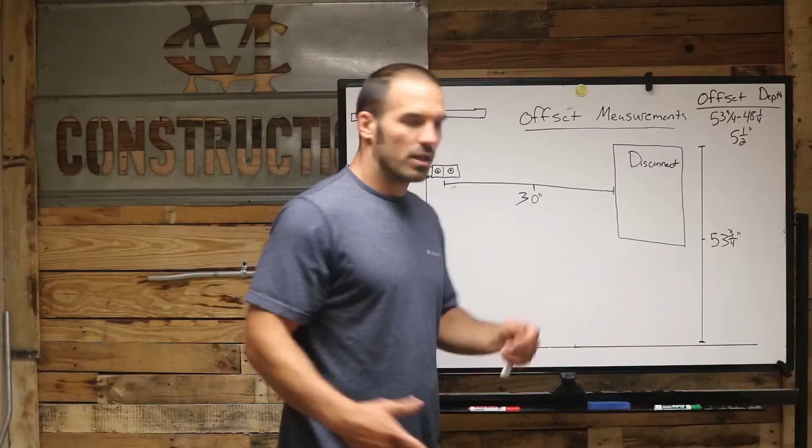In our scenario today, we're going to be trying to get over this disconnect in the field. It could be a plumber's pipe, it could be a HVAC pipe, it could be anything. So before you bend your offset, there are three key measurements you got to take, okay? The first measurement is going to be the distance between your pipe and whatever you're trying to go over or around. So in our scenario, we're going over a disconnect.

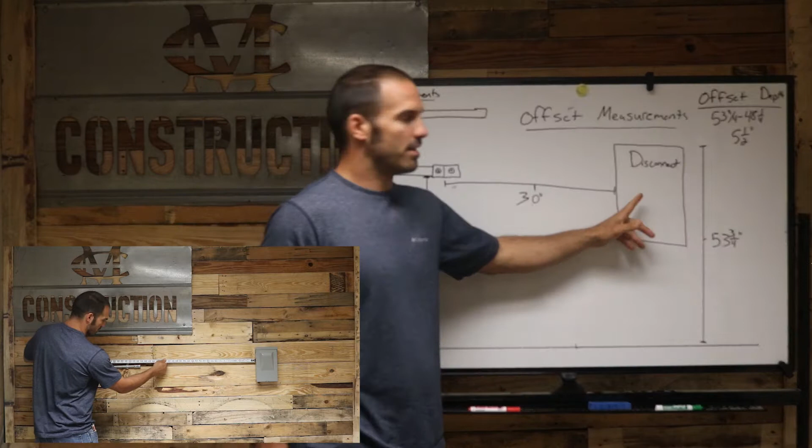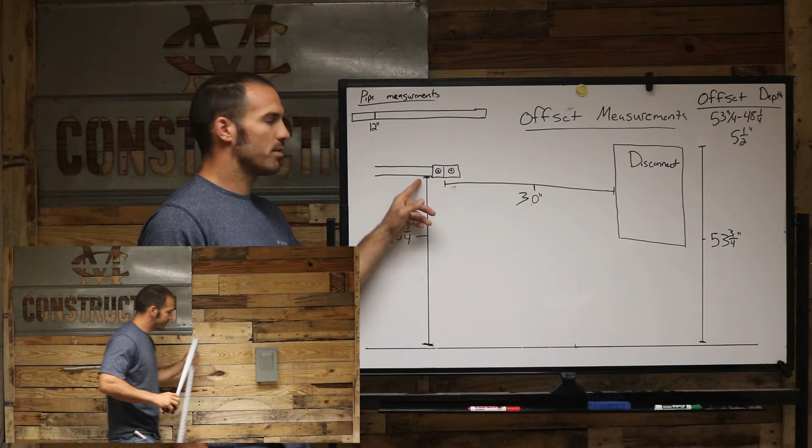I'll measure from the center of the coupling to the edge of the disconnect. We got 30 inches, okay? The next two measurements are important to calculate your offset depth. So the first one, you'll measure from the ground to the bottom of your pipe. Or if you're working on a lift, you can measure from the roof or something. But something that is flat, level, you can measure off of.

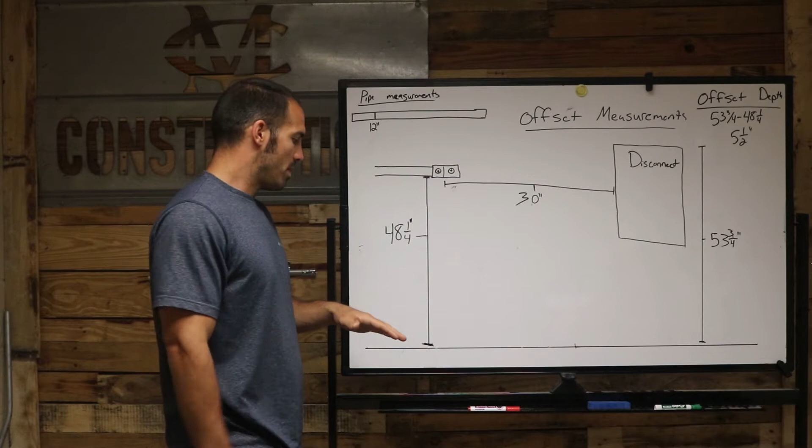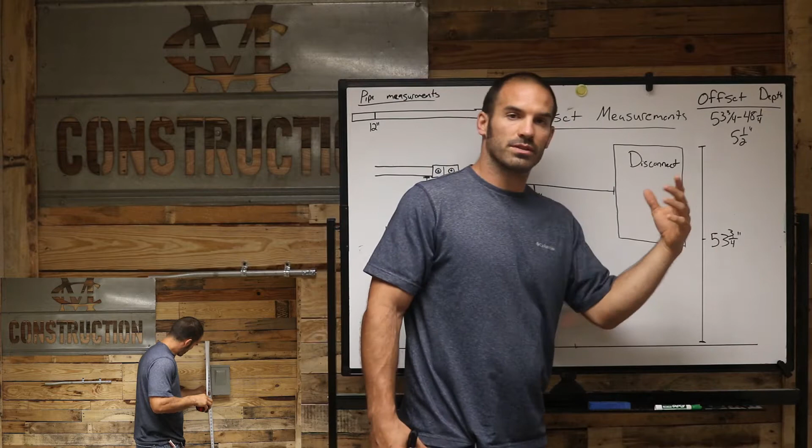So I measure from the ground because we're on the ground. 48.25 from the ground to the bottom of the pipe. I'll measure from the ground up. 53.75 is my measurement. So what I want to do with those two measurements is I take my 53.75 and I subtract my 48.25 from it, so that gave us 5.5.

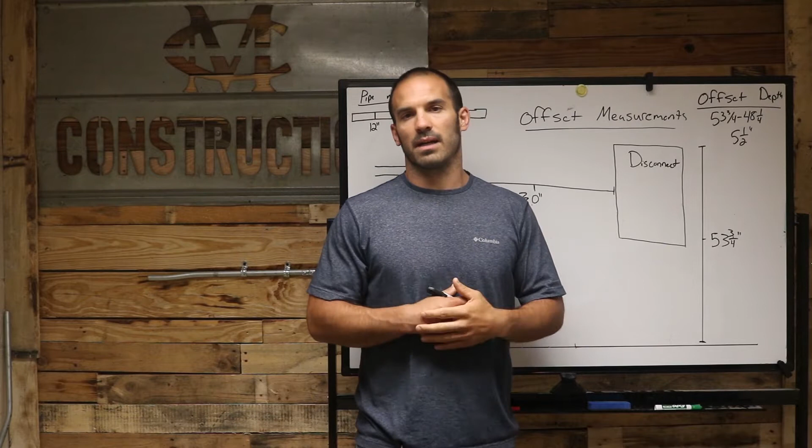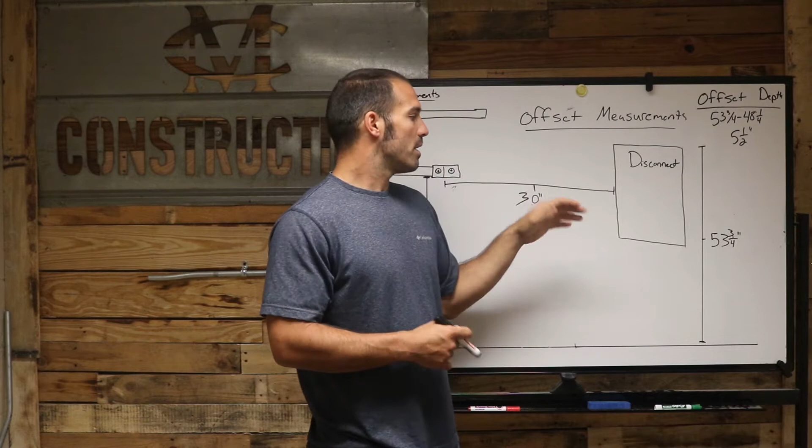Okay, I like to add about a ½ inch just to give some clearance. Sometimes you got to do them perfectly, but I'm gonna give myself a ½ inch clearance over this disconnect since my pipes in the disconnect are coming from the ground and I can go over. So I'm gonna do a 6-inch offset.

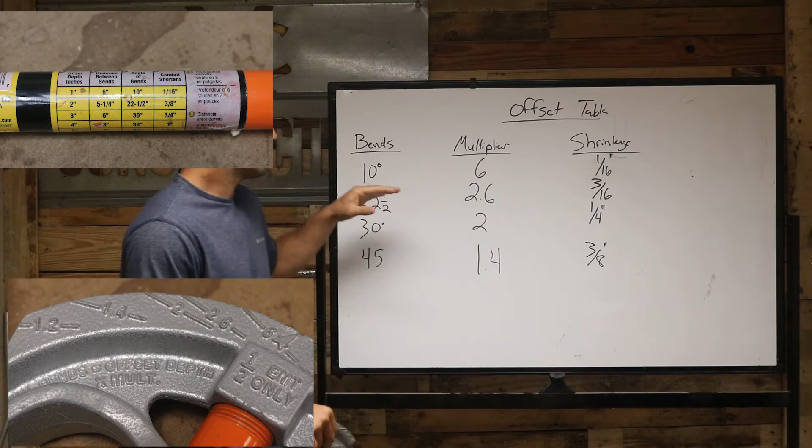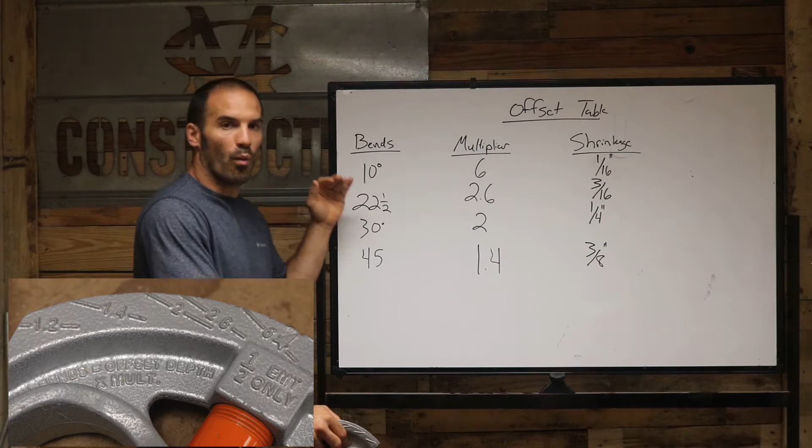So when you're bending an offset, the first thing you're going to need to look at is your tables. Okay, so they have your measurement tables on the bender. I got them right up here so you can see them a little bit bigger. They're pretty simple. Just know if you're doing two 10-degree bends, then your multiplier is 6 and your shrinkage is 1/16 per inch. Okay, and then you can just follow down the table depending on what your degree of bends is, and you can go off that measurement for your multiplier.

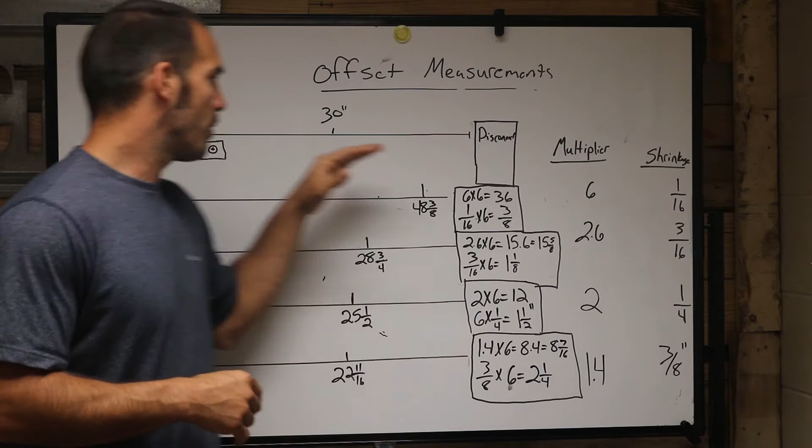Alright, so here is our offset measurement calculations. Now, depending on how much space you have between your pipe and whatever you need to offset over will justify what bend you make. So in our scenario, we got 30 inches from the end of our pipe to our disconnect. So I got a few examples here of a 10, a 22, a 30, and a 45 of just how the bends will land on a 6-inch offset.

Okay, another thing you need to calculate is degree of bend. So you can only have 360 degrees in a bend on a full run of pipe. So if you already have a couple 90s in here, then you might have to do a 22.5 or a 30-degree bend because a 45 will get you over that 360 degrees. This is an example of where the bends will fall at different degrees.

So our first one is a 10-degree offset. Okay, our multiplier for 10 degrees is 6, and our shrinkage is at 1/16. So our offset is going to be 6 inches. Okay, so we'll do our multiplier 6. We'll multiply it by our offset depth, which is 6, gives us 36 inches between the two bends. Then we have to calculate for our shrinkage. A 1/16 of an inch times our offset depth, which is 6, gives us 3/8.

So our first mark, we don't want to come too close to the end of the pipe because you won't be able to make that bend. So our first mark is at 12. So I add my shrinkage to that first mark, so it'll be 12 3/8. And then I add my distance between the bends, which is 36. So 12 3/8 plus 36 is 48 3/8. Okay. Now, as you can see, I only have 30 inches between my disconnect and my pipe, so a 10-degree is definitely not going to work.

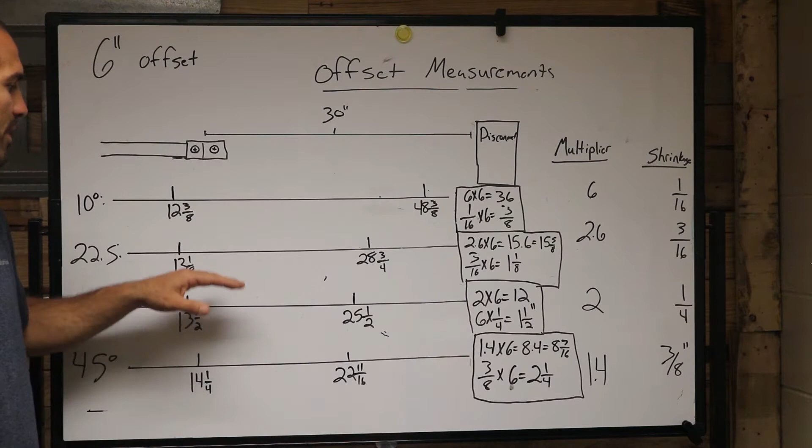Okay, and then I got all these kind of labeled out where they'd be. For 22.5, our multiplier is 2.6, so we would need 2.6 times 6 is 15.6, or 15 5/8. So I would need 15 5/8 in between these two bends. Okay, we had to add for our shrinkage, which is 1 1/8. So 12 plus 1 1/8 gives us 13 1/8.

Then we add that 15 5/8. 15 5/8 plus 13 1/8 is 28 3/4. That's still not going to work because that second bend is just too close to that disconnect, and the bend is probably going to be in the disconnect. Our last two options are a 30 and a 45.

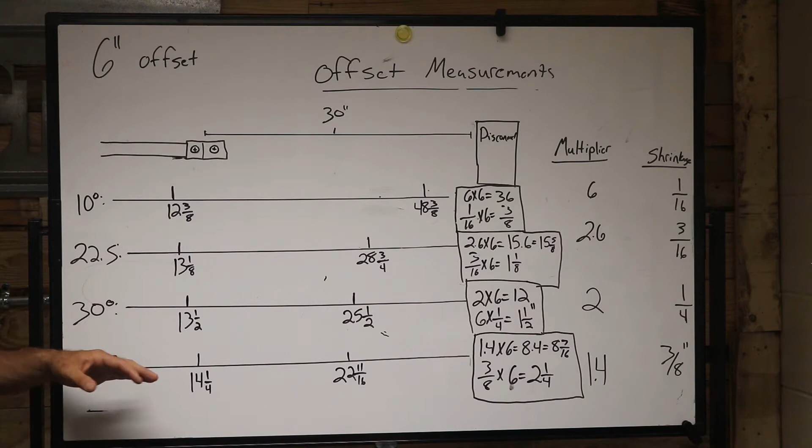I did the same math over here: multiplier 2 times 6 is 12, and I added our shrinkage, so 12 plus 1.5 inches for our shrinkage is 13.5, and then I add that 12 inches between our bends, 13.5 plus 12 is 25.5. So as you can see, that bend right there would work perfectly. I usually use 30s when I bend offsets, but you could use a 45 also. Like I said, it just depends how much bend you already have in that run of pipe.

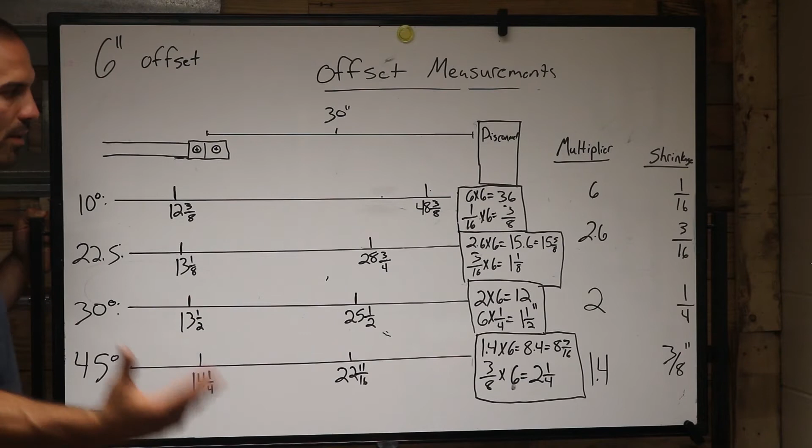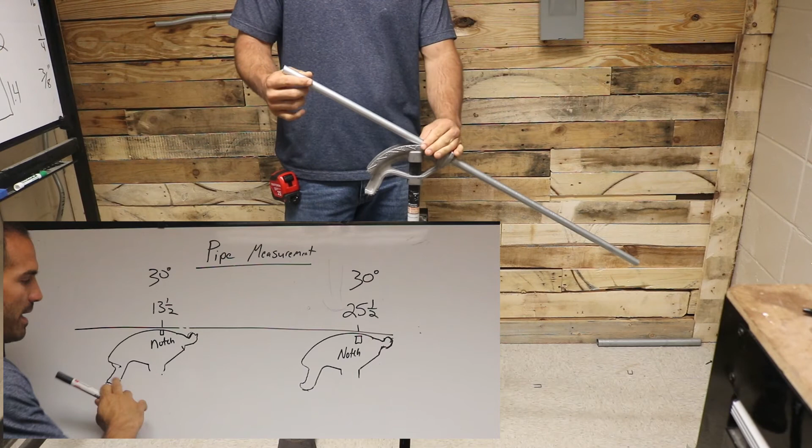So I got my measurements laid out. I'm at 13.5 and then 25.5. Okay, so how I do it is I start with my first measurement, which is 13.5. I bend them on the notch because that is like the center of the bend, so I found that to be the best for my method. I line up my 13.5 on the notch, and then I'm gonna bend it down to where the bottom of the pipe's even with 30 degrees, so it'll look just like that right there.

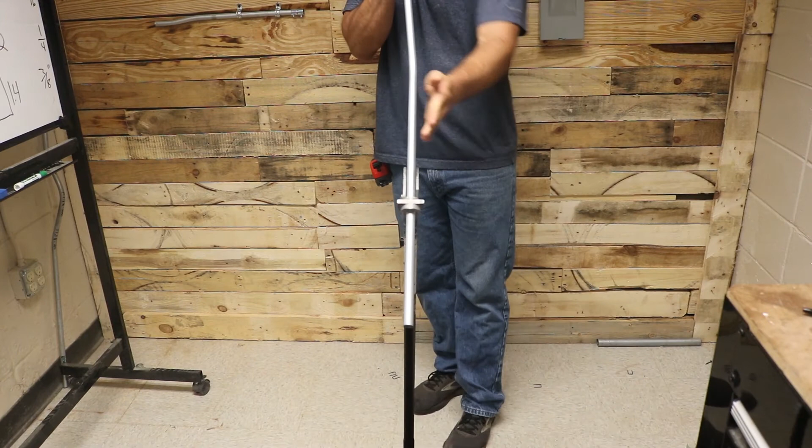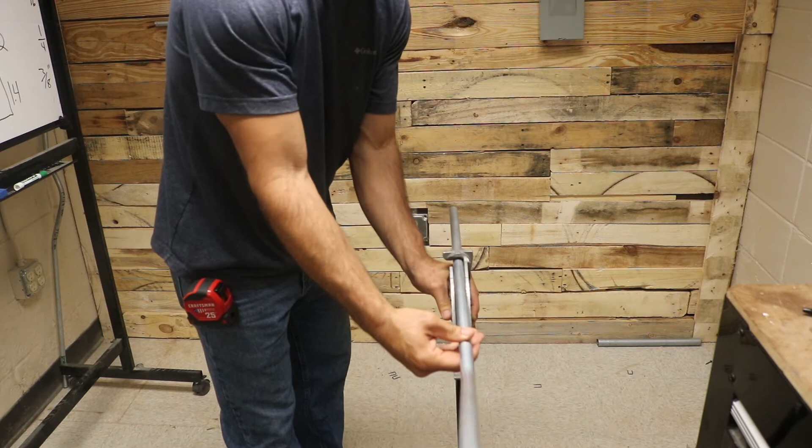Okay, then I'm gonna take my pipe, slide it down, and stick my next mark on that notch right there. I'm gonna rotate it around here. And you want that pipe straight with the bender, just so you can see it from your view. I can't tell if that's quite straight or not because I'm looking backwards at it, but you want to get that pipe straight, and you don't want it dog-legged, because your offset will not be straight. So you want your mark on the notch, get it straight.

When you make this second bend, make sure that you do not take bend out of the first bend. It's hard to do if the bends are close together, but just make sure that you do not do that, and then just bend it down to your 30 right there. So that's what you should get. Now you can see it looks like I got a little more bend in one or the other.

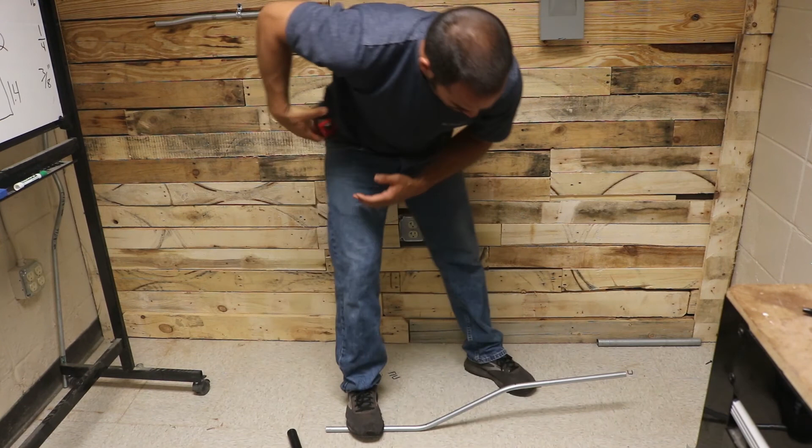So what you can do is stick the pipe on the ground and check your measurement. I should have 6 inches to the bottom of that pipe, which I do. Now you can check your measurement at the end, and look, I got 6.5. So what that means is I need a little bit more bend in this bend right here. So I'll stick it back in the bender, and I'm talking probably 2 to 3 degrees of more bend. So it's not like we're putting a whole lot of bend in here, we're just adding that extra little bit.

So stick that pipe back in that bender, and you're gonna add, like I said, 2 to 3 degrees, not much, and you're just getting that pipe where it's running level with the ground here. And now let's check it, and as you can see, 6 inches at the end, and then 6 inches on the front side.

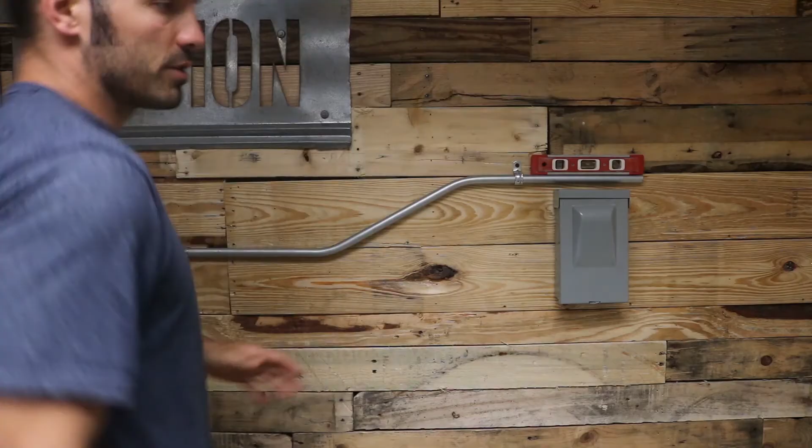So here's the completed offset. As I mentioned before, in our original offset we had 5.5 inches from the bottom of the pipe to the top of the disconnect, so we did a 6 inch offset, which gave us about 1/2 inch clearance right here. Before you strap it up, make sure you put a level on both ends, and that way it is running level.